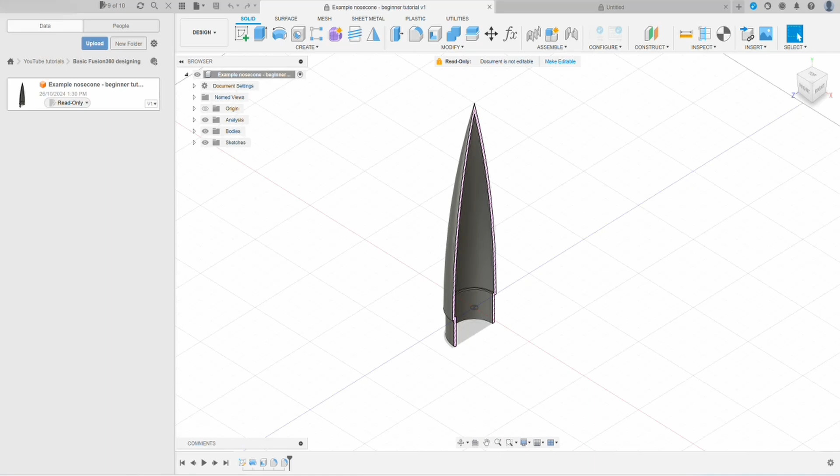Alright, let's get started. Here I have an example nose cone just to show you for now, but we are going to build a nose cone quite soon. This is a very simple nose cone that you can make in Fusion 360.

You can see the timeline here, which is very important. There is editable and read-only. What this does is save Fusion 360 space. When it's editable, you can edit it, however when it's read-only, you cannot. You have a maximum of 10 editable projects.

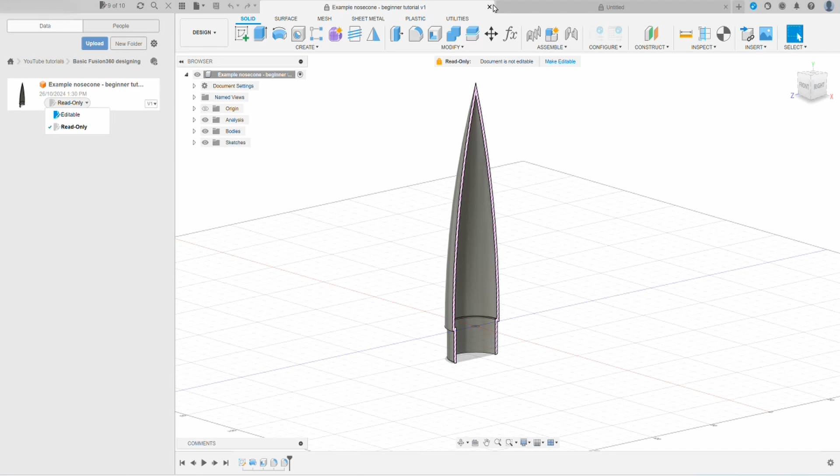Alright, I'm going to now build a nose cone with you. I'm going to cover doing sketches, revolves, extrudes, shells, and fillets. You'll see what those are later.

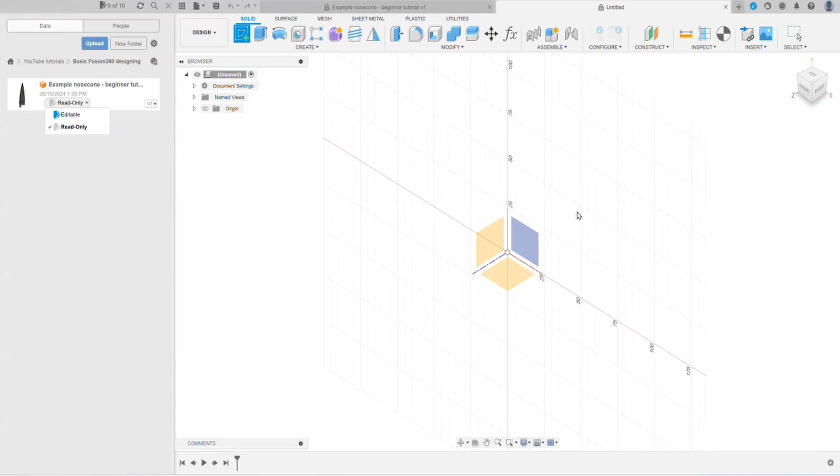Alright, up here we have a functions and utilities bar. Here we'll press create sketch. Now you can see the 3 planes that you can create it on. Make sure that you create it on the side.

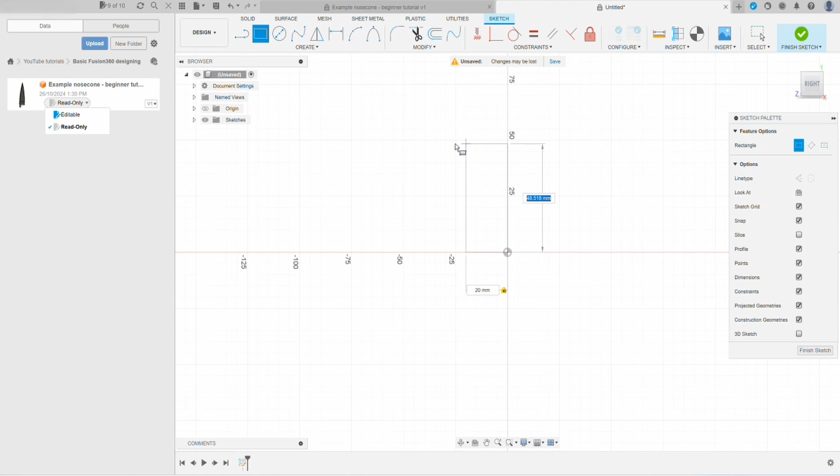What we're going to do is get a 2-point rectangle. This is the size your nose cone will be. Remember to half it on the side because it's going to be duplicated the other way. So we're going to change this to 20, which makes it 40 mils in diameter, and we're going to change the height of it to 150. So it'll be a 20 by 150 nose cone arc.

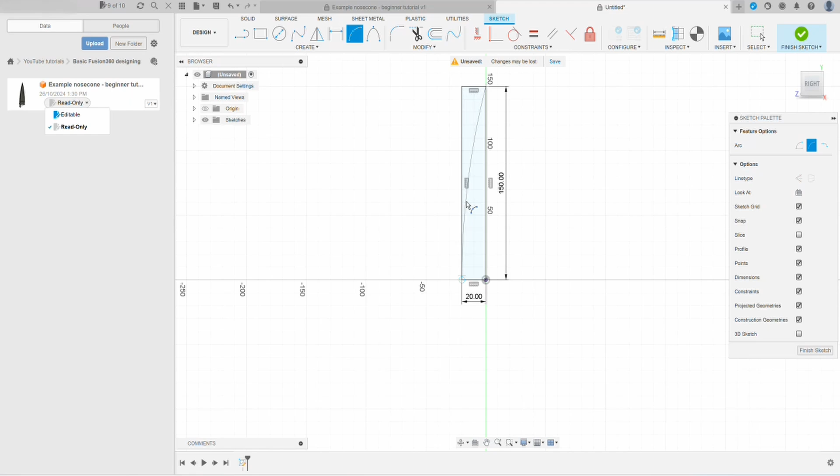Now up here in create, we press that, and down here we can get a 3-point arc. So we'll press that, and what you first have to do is select the 2 corner points, then you can make the circle that you want. I'm going to do it where it shows that indicator next to the 20 - this means that the very bottom of it is just barely in. I'm going to click now, it's going to do that.

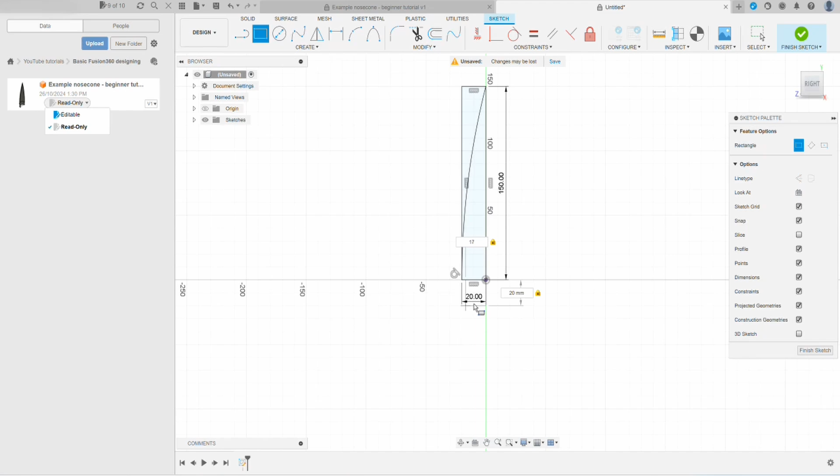Okay, now I'm going to get another 2-point rectangle and add it onto the main center, and make it about 20 mils - 17 and 17.6. Alright, that will be our shoulder for the nose cone. The reason I'm making it 17.6 instead of 18 is because of tolerancing. I'd recommend that you do 0.4 millimeters tolerancing - that's just my preference.

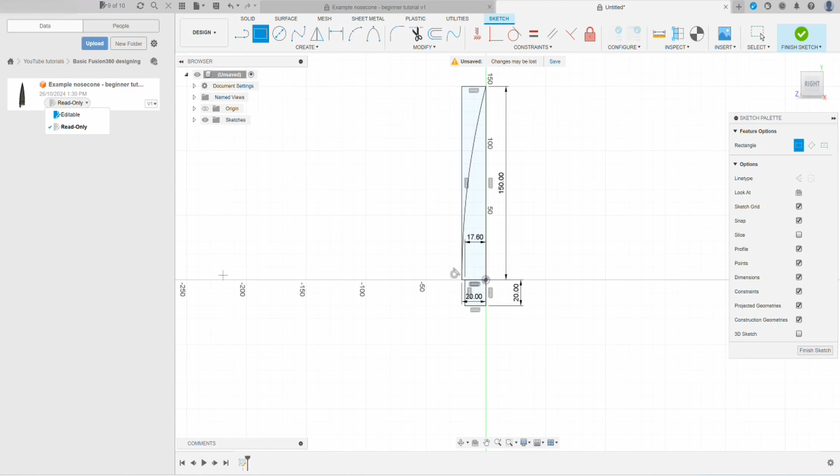Alright, up here we're going to press finish sketch. Now you can see that we have a side wall of a nose cone.

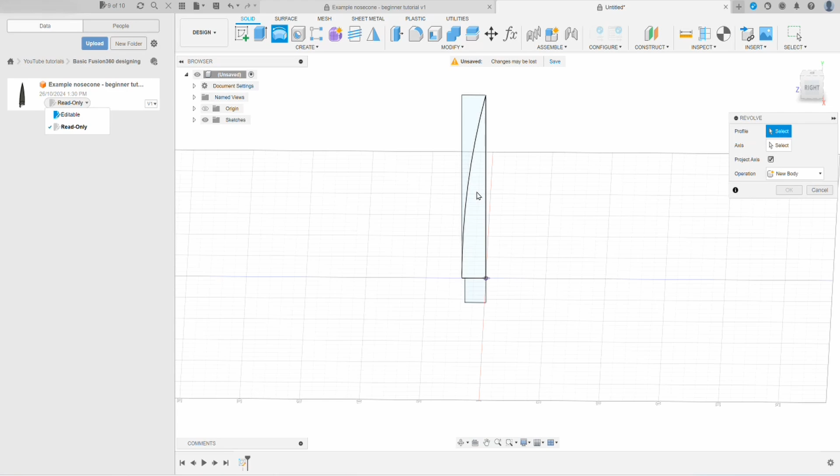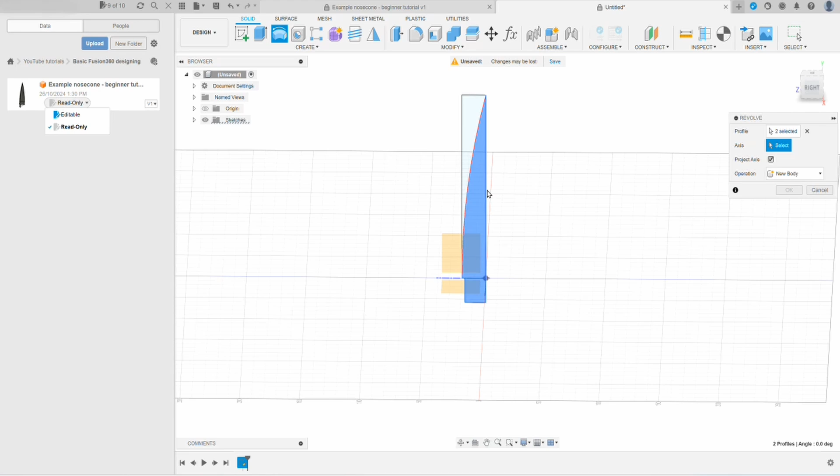We're going to press revolve up here. Now over here we've got profile selected, so we're going to click this side of the rectangle, and we're also going to press this. Now it needs an axis to rotate around, so I'm going to press here at the center. Now the operation is new body - you have things like join, cut, but those are the main ones, but it has to be new body right now.

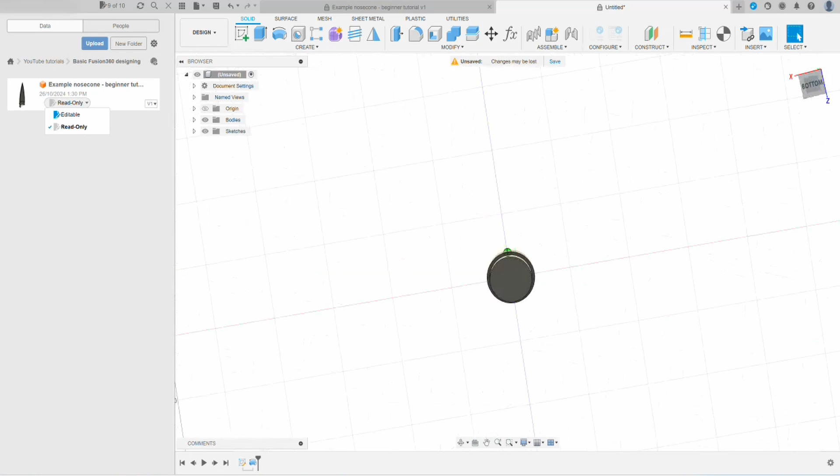Alright, we've got what looks to be a beautiful nose cone. However, the only problem is that it's not hollow. What we can use for this is the shell tool, but keep in mind there are lots of ways of doing that.

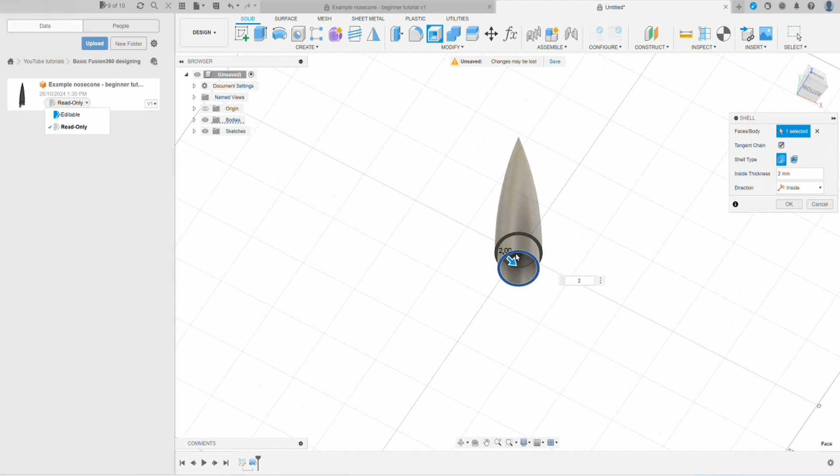What I'm going to do is press it on the bottom. Now I'm going to make it 2 - this is how thick the walls will be. We can see that the inside is now hollow. I'm going to press OK.

Alright, what we can do to analyze the half of it is press section analysis here and inspect. Now I'm just going to press the cut plane here.

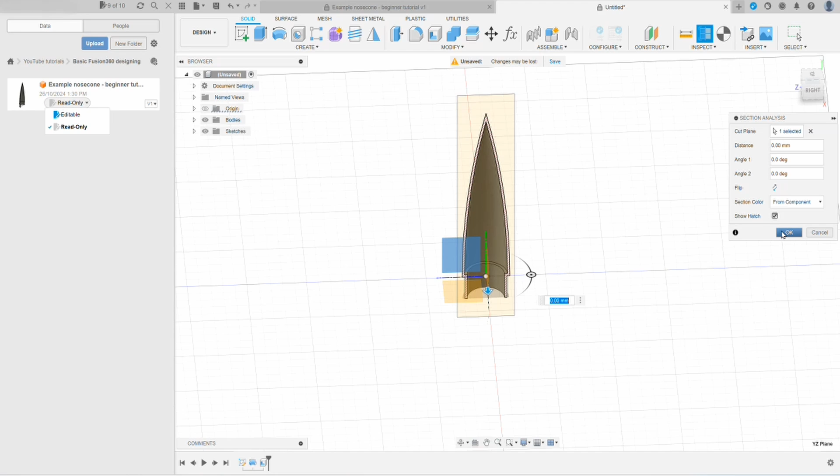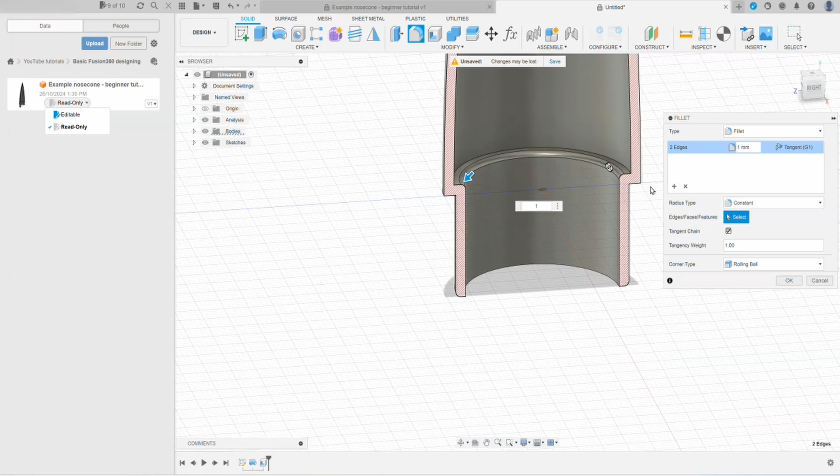We have a pretty good nose cone, however I think some edges could be rounded off. For that, we're going to use the fillet. I'm going to use the fillet here in modify, and select a few corners - I'll do it there, and also there. Okay, let's try doing it by 0.5. Maybe 1. I'll do it by 1. Now this looks like a very good nose cone.

Do keep in mind though that there are other ways of making a nose cone. Now that we've done most of the nose cone, I'm going to have a quick break and look at a rocket launch.

Sky is clear, range is clear. Going in 5, 4, 3, 2, 1.

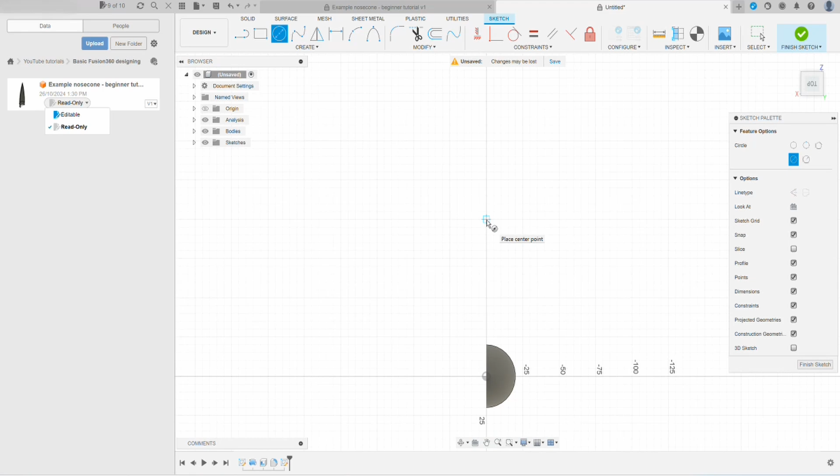Now we're going to do an extrude, but it isn't a part of the nose cone, though it's very useful to know how to use one. I'm going to create a sketch, except make it flat, and create a center diameter circle just off to the center, making it 40 mils.

Go finish sketch. With this, we can press extrude and make it go 150 millimeters tall. Now we can see, if we disable analysis by clicking on the eye icon, that this is a cylinder. This is what extrudes do.

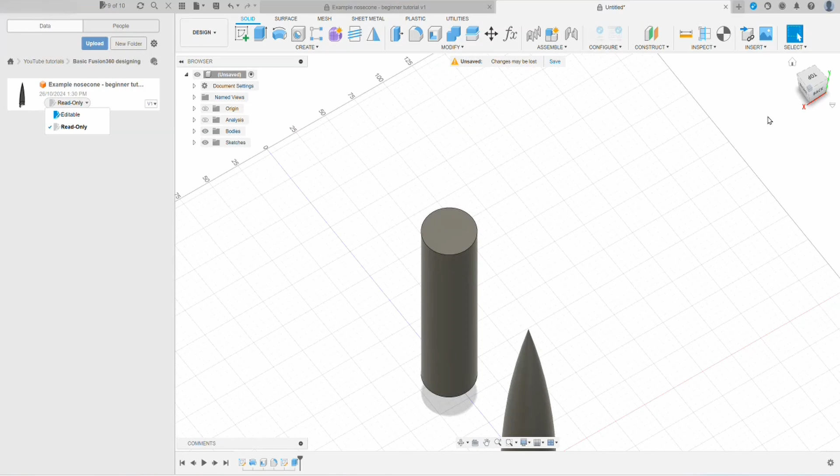Keep in mind that we can also fillet this cylinder. However, if we fillet it too far, it gives us an error. I don't want to fillet it though, so I'm going to press cancel.

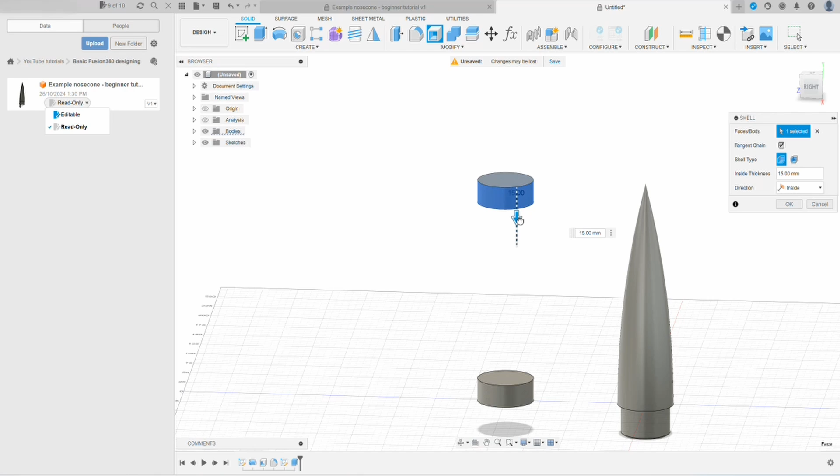If we get the shell tool out and click on this, you can notice that this doesn't really work, so we've pressed it on the wrong side. I'm going to press shell on the top or bottom side instead, just going to the top. Now you can see that it works the way I want it, and also it has a floor on the bottom that's exactly 2 millimeters thick.

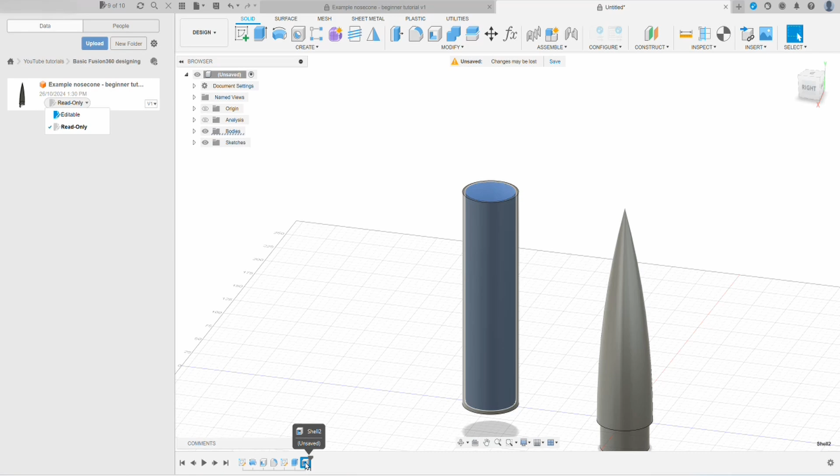Now let's say we want to delete one of these. What I'm going to do is go down here to the timeline. I'm going to delete this shell by clicking on it and pressing delete. I'm also going to delete the extrude and the sketch. That's how you delete stuff.

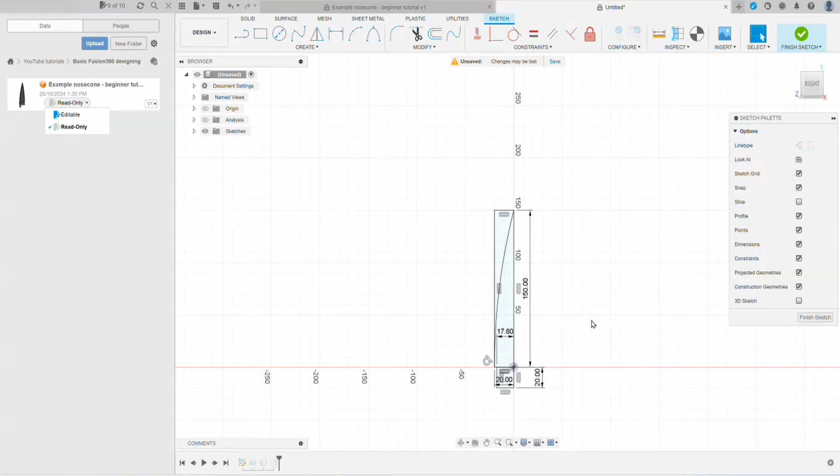Alrighty, that is good. Let's revisit the tolerancing and check if it's good. We can go back into the sketch by double clicking it if it is unselected. Now we can see that it's 17.6. I find that this is good for my printer, however you will have to find what's best for yours. Again, we just go out by pressing finish sketch.

Now that we've got a good design, I want to save it. What we have to do is right click on the object, and down here there's a button called Save as Mesh. We'll press that. Now in the format here you can do lots of things, but 3MF is what I like best because it's like an STL, except it saves more space in the computer.

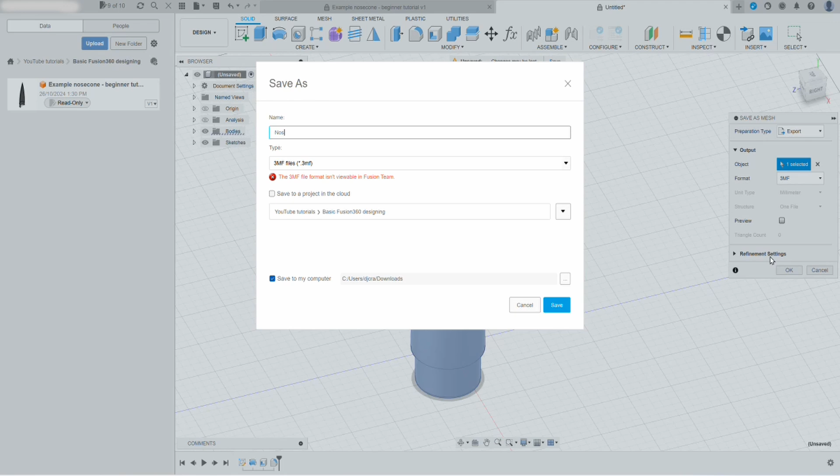Next what we're going to do is press OK. Here you can name it, which I'm going to name Nosecone, and then you can press save. Alright, this looks like a very good nose cone.

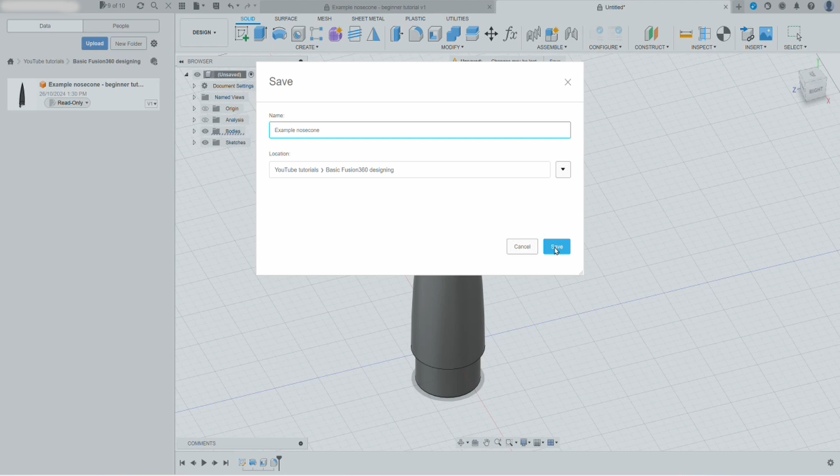Now that this is good, we can save it by pressing Control S. We can name it, which I'm going to name Example Nose Cone, and then you just press save there and it automatically saves. Now it shows up in the side panel here.

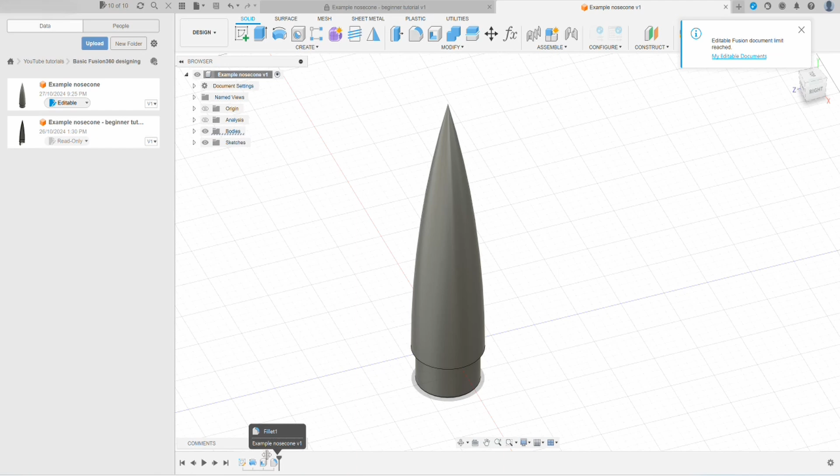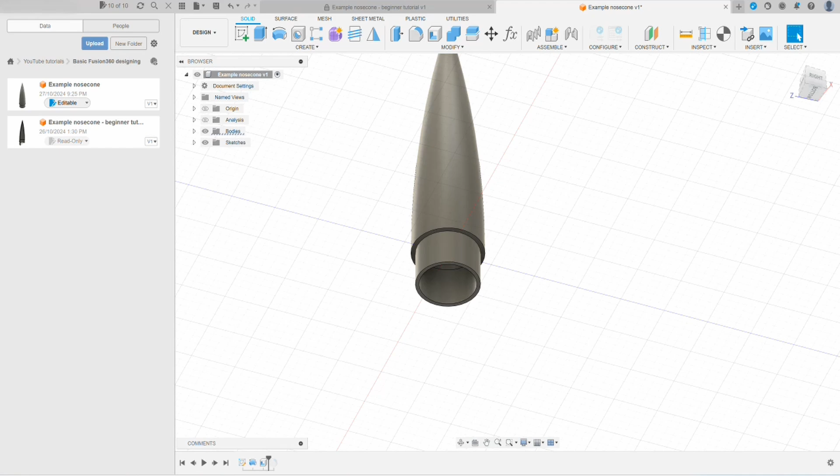Now we're going to go into the timeline. This little pin here, we can drag it around to see what's happened through the timeline. We can see if we go before the revolve, then nothing shows up. However, if we go after, it shows the nose cone, except it hasn't been filleted, nor has it been shelled. If we go into the shell, then it's been shelled, and if we go through the fillet, then it's been filleted. That's generally how the timeline works.

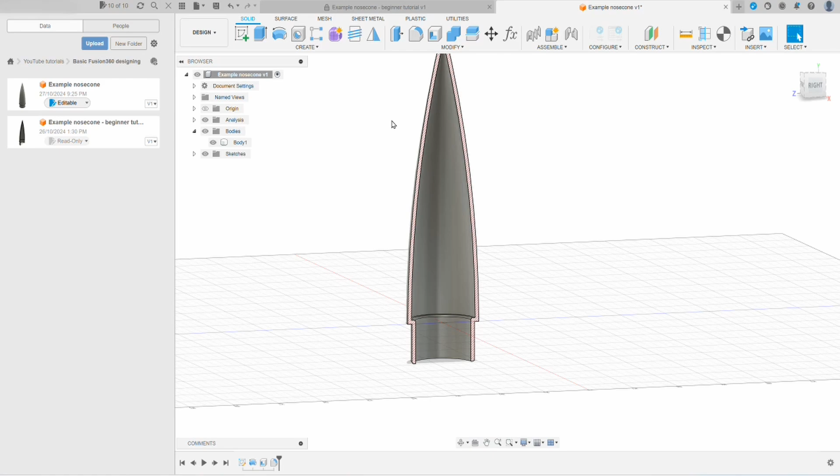You also have these cool buttons that let you play through it. Now we also have this thing up here. If we go into it, we can also change visibilities. So if we go to bodies, then we can show or hide the nose cone. This is especially useful when you have multiple components together.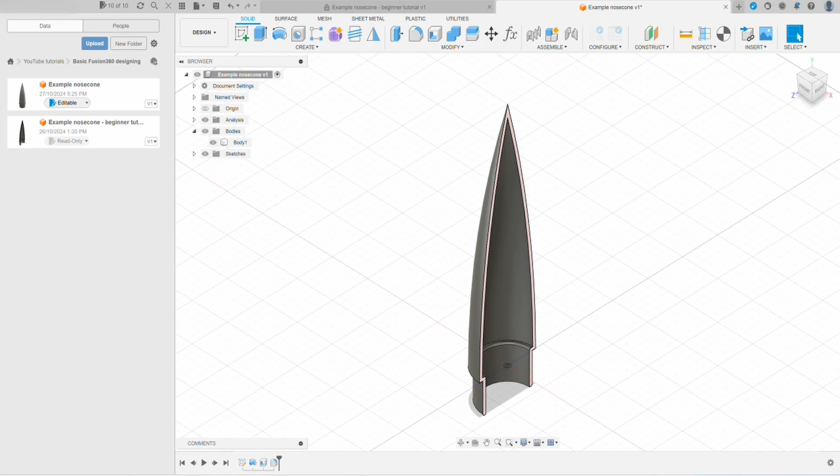To summarize, we have covered off sketches, extrudes, revolves, shells, and fillets. However, in the next tutorial, which will be advanced, we'll show you complicated things like threads and also lofts. I hope you learnt a few new tips for Fusion 360. Have a great day and see you in the next video.